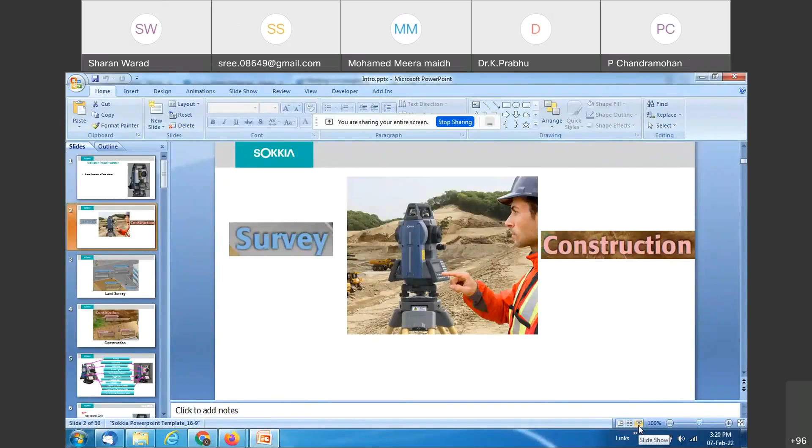Okay, so let us start now.

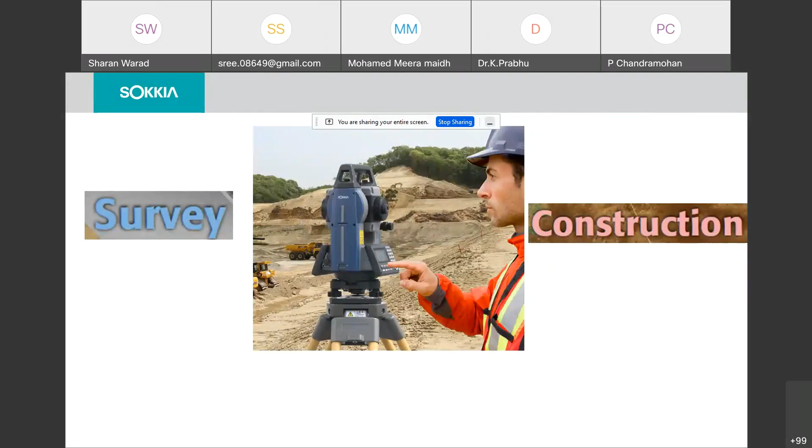So basically, the total station is used for construction as well as for land surveying. In land surveying, mainly you can do topographical survey, coordinate measurements, boundary survey, cadastral surveys, area calculations, cross section surveys. So these are all the applications which you are able to perform with land surveying.

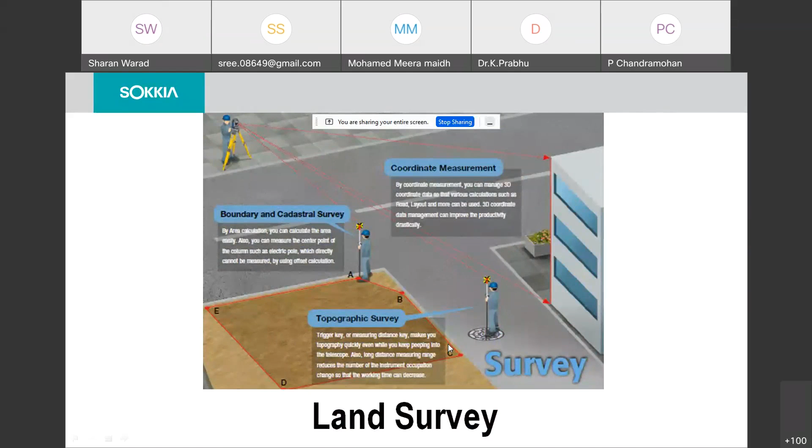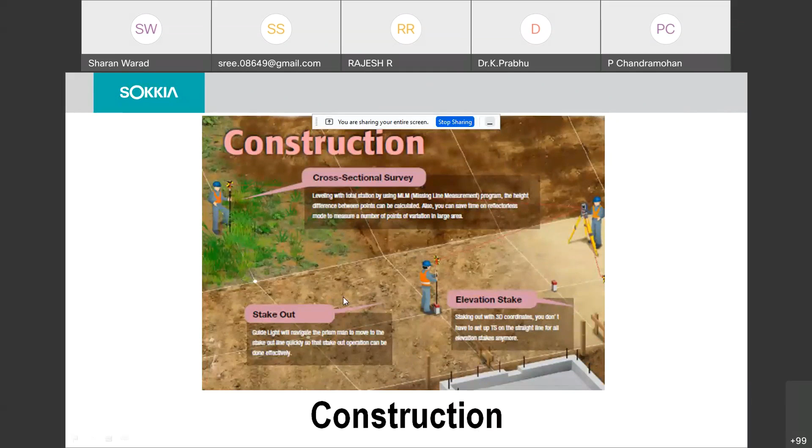And if you go for construction, you can use it mainly for setting out work. Setting out work is for marking the points in the field. For that purpose, construction field people mainly use the total station. So now I will start with the physical appearance of the total station.

So mainly the total station has the handle portion, then the advanced EDM portion built in with the telescope, and then the USB ports for data communication from the total station memory to the PC. Then another option called guide light. The guide light function is provided here, and it is mainly useful when you do setting out work.

And then we have a rechargeable battery compartment, so the instrument operates with the battery. The slots are provided here, built-in battery. And then the trigger key option for the fastest measurements of distance and coordinates. And this is the display panel, tribrach for doing the instrument leveling and centering, and the optical and laser plummet to locate the ground point in the field.

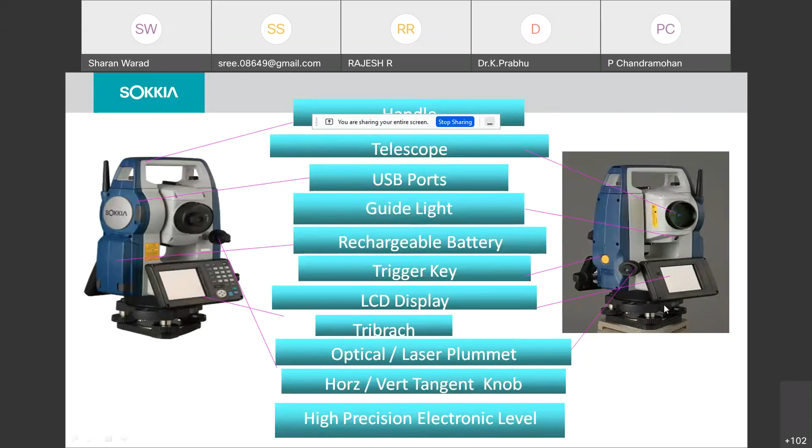And the next point is horizontal and vertical movement. Tangent knobs are provided here, and with these knobs you are able to move the instrument in horizontal and vertical positions. It has also been provided with lock and fine motions. And there is a high precision electronic level built into the instrument display. So this is the display component. This is the main appearance of the instrument.

So the instrument EDM part is fixed in the telescope portion. This instrument has a capacity to measure distance up to 6 kilometer range. It's an advanced EDM technology, with a facility to measure distance up to 6 kilometers, with an accuracy of 1.5 mm plus 2 ppm. So normally you can find the accuracy in this particular mode is 1.5 mm plus 2 ppm.

That means if you measure up to 1 kilometer range, your accuracy limit will be approximately 3.5 mm. So that is the accuracy level you are able to achieve in distance measurement with total stations. So for a 1 kilometer range, your readings will be accurate to approximately around 3.5 mm. That is how you have to calculate it.

So basically, in distance measurement, normally in survey applications, maximum you can cover 300 meters to 1 to 2 kilometers range only, in basic city environments and other conditions. For high range distance, like the 6 kilometer range, mainly you can cover it in a mining environment. In mining there is a very open vast area. In that area, you are able to cover the maximum range of 6 kilometers.

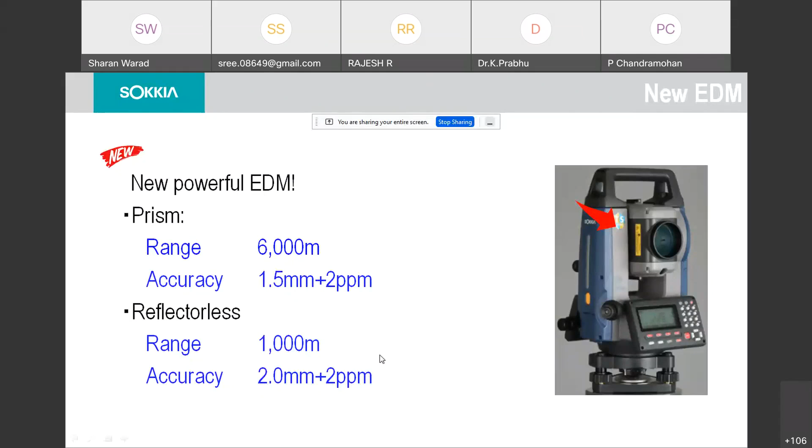So if you are sighting at a 300 meter range and the surface of the point is very dark, a blackish surface, you can't get the distance on dark surfaces. If the surface is very light and reflective, you can cover up to a range of 1 kilometer in reflectorless mode. The same way, the accuracy of reflectorless measurement will be 2 mm plus 2 ppm. So this is the normal accuracy range in distance measurement with the reflectorless option.

So the next slide, I am going to the battery conditions. So normally the battery, if you are going to carry, it will work for 21 hours. 21 hours is the normal battery working and operating hours. So when you are going to the survey, you need a battery which is able to work from morning to evening, till the end of the day when you are completing the survey work. So you require huge battery operating hours.

So some batteries are there, they will work only for 4 hours. So with that, it will not help you to continue the survey for the full day. So you have to carry an additional battery also together to complete the full day work. But we are normally providing a higher capacity battery, which will provide you up to 21 hours minimum in

the normal mode. And of course, if you are going for the reflectorless mode, then the battery consumption will be a little more. So instead of 21 hours, likely it will come down maybe to 18 hours like that. So better you can go with the higher capacity battery, which can give you minimum 20 to 24 hours capacity, which is required for doing the survey work.

And there is an option also we are providing to have an external battery. So this is the internal battery which can work for 21 hours minimum, and we have an option to carry an external battery also. So this external battery is mainly useful whenever you are going to a survey in a very remote area where there isn't any power facility for charging the battery. So that time you have to carry these external batteries.

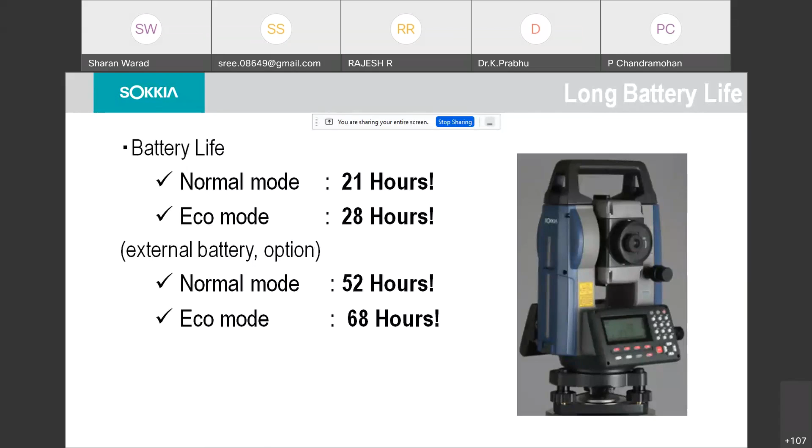And there is an option also, you can use automobile batteries also to operate the instrument. So we'll give a separate cable, and that cable you can connect to external batteries like automobile batteries. With that kind of battery also you can use it for the total station. So these are the batteries which are very much required for operating the instruments.

And then this is the common thing which I want to tell you, the operating system. So normally two operating systems are there in the instruments. One is Linux based and the other is Windows based. So the Linux based system normally comes with a conventional type total station. So with these entry level total stations, if you are buying, your operating system will be the Linux format only. And if you go for the advanced one, then you will have a Windows format.

So the basic difference between Linux and Windows format, I will just tell you. So in Linux format, all the data will be recorded in the manufacturer's own format. So every manufacturer has their own format. In that format only, the data will be recorded in memory. So after that, you have to take the data into the computer PC, and then you have to use the communication software. That is a data transfer software, you can say.

So the data transfer software will convert the manufacturer's own format to the format which you require for processing, like drawing format, Excel format. So like that, this communication software is essential to convert the SDR, the manufacturer's preferred software format, to the required format. That is the normal Linux format which we are providing.

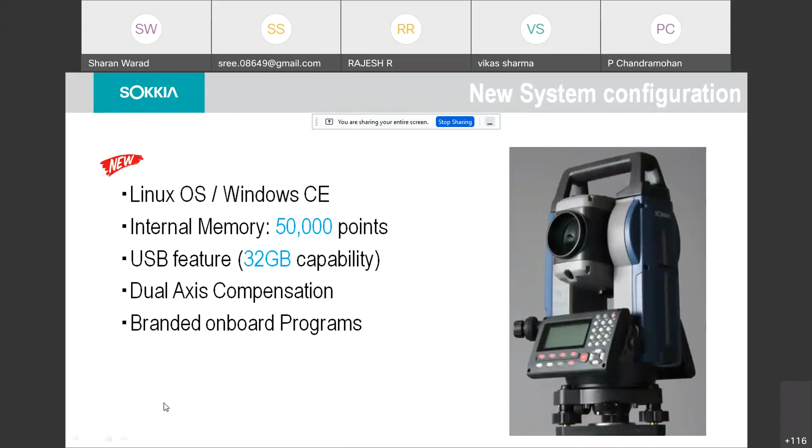So the next one is Bluetooth connectivity. With the Bluetooth facility, whatever the instrument displays, you can pair it with an external device like a PC, tablet, or mobile. You can pair that display and view it from remote places at a distance of around 10 meters.

For example, this Bluetooth facility will be very useful in indoor applications, mainly for industrial purposes. In industry, the equipment will be fixed in some remote location where you can't access the instrument at that particular point. So they keep the equipment remote and pair the instrument display to another external device, and with that device they can monitor and take the measurements and display them in remote places. That is the way they use the Bluetooth option, to pair the display to another device.

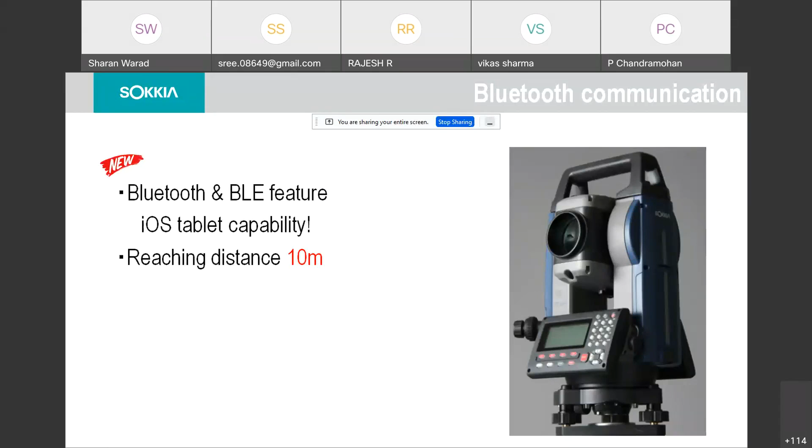Then the second one is temperature. This equipment is designed to work from minus 20 degrees centigrade to plus 60 degrees centigrade, so in any atmosphere this equipment is capable of working. If you go to extreme weather conditions in the field with snow, it will work at minus 20 degrees. And if you are working in mining and very hot areas, it will cover up to a 60 degree temperature range.

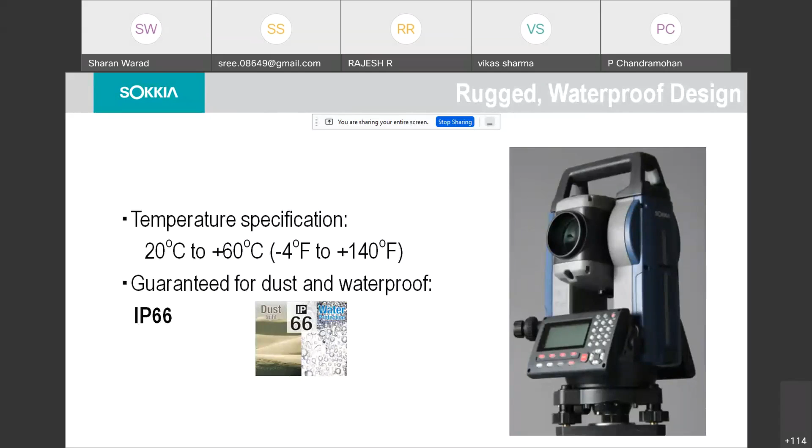And another thing, we have an advanced feature called the trigger key. The equipment is provided with a trigger key option, which is helpful for taking the fastest measurements. Normally, to take a reading you have to sight the telescope, then look at the display, where there is a measure key. You press the measure key, the instrument records the data, and then you have to input the point numbers, code and everything. This is the normal procedure in conventional instruments.

Yeah. So this trigger key will be very useful whenever you are doing contour work and faster topographical surveys. For that type of surveying you can use this trigger key option. The trigger key will increase your speed of surveying.

And another option is called the tangent screw system. We have horizontal and vertical movement that will be provided with a tangent knob. You can set the knob, you can lock that horizontal movement, then you can go with the fine measurements for the horizontal and vertical movements.

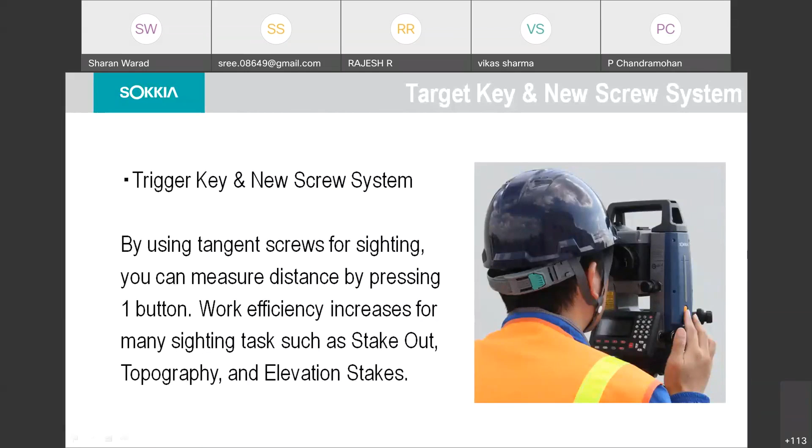So next one is the guide light system. This feature is very much helpful while doing the setting out work in construction field applications. Normally in construction applications they have the coordinates, and that coordinate has to be marked on the ground. So normally, conventionally, people will input the coordinate to the total station, and you will move the total station to the required direction, and you will lock

the horizontal movement. After that, you will guide the person who is holding the prism. You have to keep guiding the person who is holding the prism to go the right way or left way. So your prism person has to wait for the instruction from the operator whether to move in the right direction or left direction. That is the common thing you conventionally have to do.

But with this guide light system, if you switch on the guide light system, two lights will be provided: a green light and a red light. If the person who is holding the prism can see the green light, it means he has to go towards the right direction, and if the red light is visible, then he has to come to the

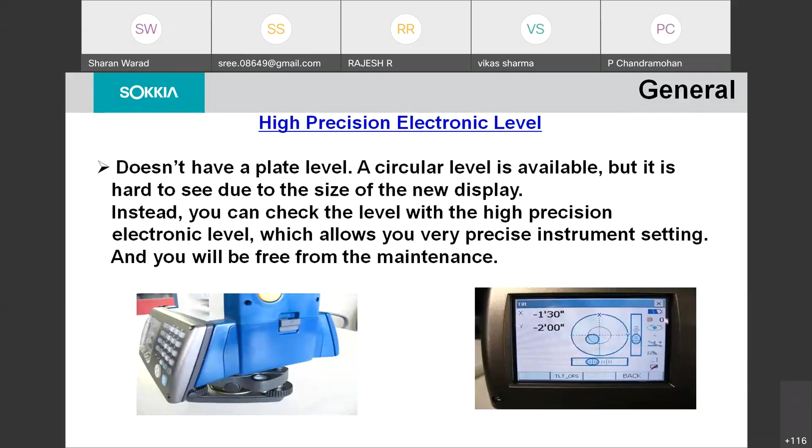So basically, these are the accessories which may not be commonly used for total stations. For total stations, normally you need to use a wooden tripod. The wooden tripod is advisable. Most people will carry the aluminum one, so avoid using aluminum tripods. Aluminum tripods may be more user friendly to carry, but they are not as precise when you are doing leveling work. They won't absorb the vibrations. Wooden tripods are more advisable, since they absorb the vibrations. So you can

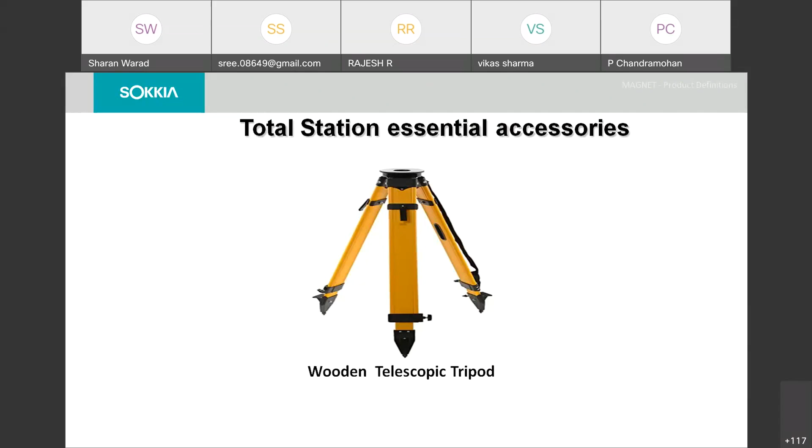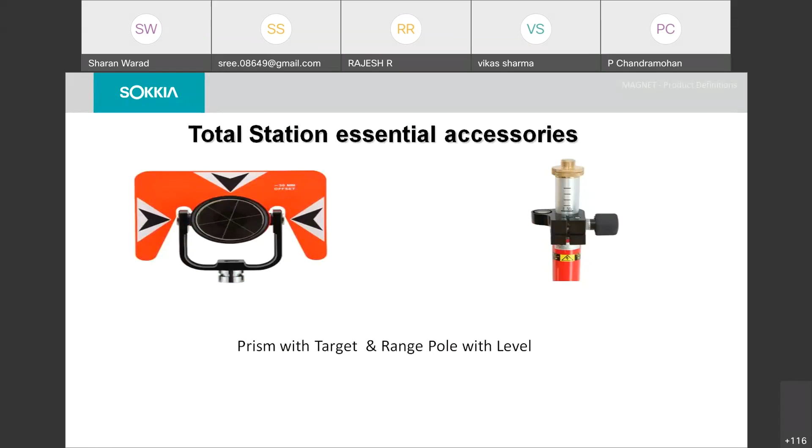use it. So this is the prism assembly which is normally used. With this prism, you can cover up to a 6 kilometer range. It is mainly used for topographical surveys. You can use the pole with the prism.

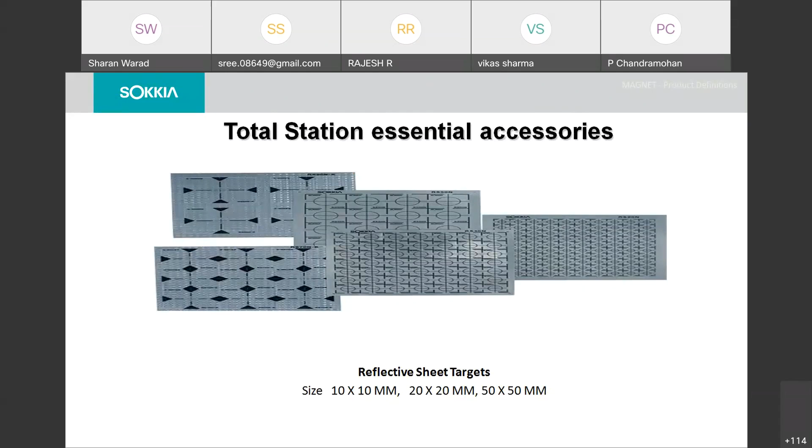And these are the reflective sheets, which are also essential total station accessories. These sheets can be fixed at permanent points. For example, if you have any permanent locations in the construction field, you can paste these sheets on any walls, objects, or structures. For those applications, you can use these reflective sheets.

When you are shifting the station using the pole prism, your errors will be increased. So if we use this traverse prism set for changing the station, your error will be minimized. Once you set the instrument centering and leveling, after that you don't need to disturb the settings.

You just interchange your total station and the prism assembly. You leave the tripod and tribrach in position itself, and only exchange the prism and the total station. If you exchange like this, your error will be minimized and your accuracy will be higher, mainly when you are doing the traverse survey.

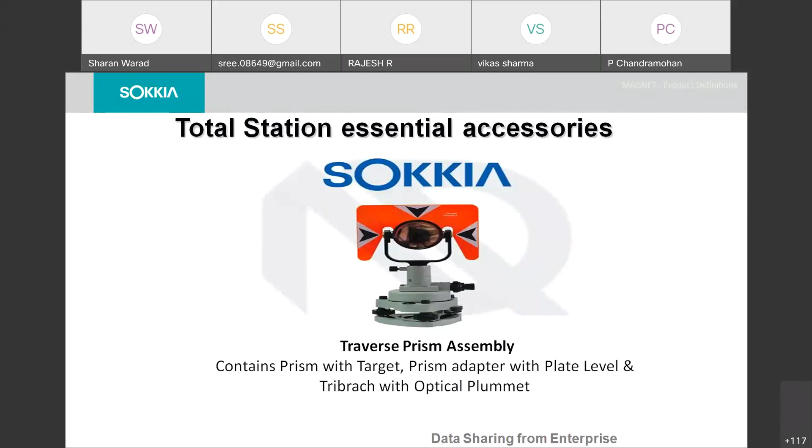Now these are the basic onboard programs available in conventional total stations, mainly height measurements and coordinate measurements. Coordinate measurement is most commonly used in total station surveys. In any total station survey, the coordinate system must be followed with all survey data, that is northing, easting, elevation. This coordinate data is used for all topographical surveys and everything.

And then setting out measurements, as I told you. In any construction field, normally design data will be provided in Excel format, and you have to mark those points in the field. For that you use this setting out function. Once you input the points which need to be set out, the direction will be provided in the system to achieve the point you want.

The same way you can go for distance setting out and arc setting out. You can define an arc, and at what distance in that arc you want to mark the point. That is arc setting out. Then set out line: you define a baseline, and from the baseline, how much offset you want to go, right side how much and left side how much.

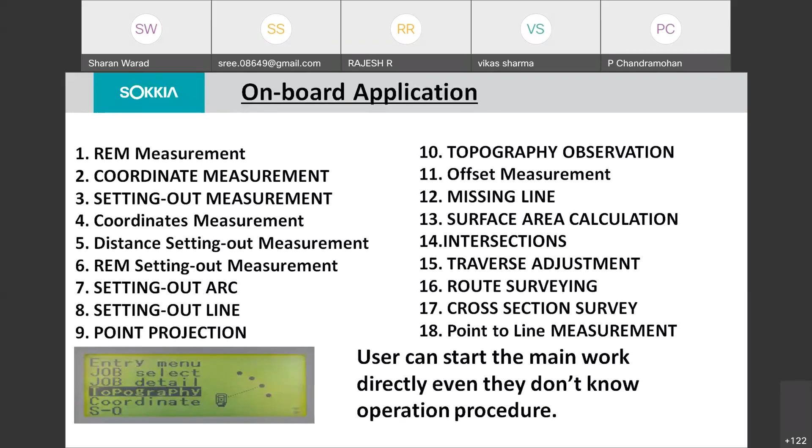And missing line measurement, which is nothing but the distance between two points. Then surface area calculation. Intersection is the point line intersection: if two lines are coming, where those lines meet is the point intersection. Then the traverse adjustment program is